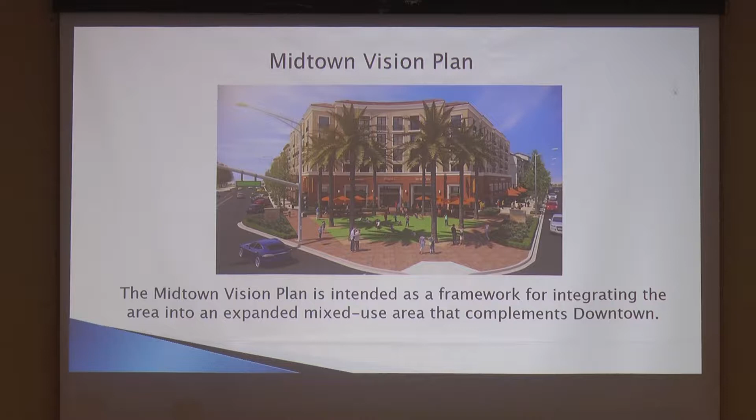The Midtown Vision Plan is based on 4 primary redevelopment objectives: maximize the economic development potential of the area by providing a variety of housing options and commercial activities; identify the best urban design framework for growth considering density, height, public space, etc.; ensure the goals of local residents are reflected in the vision; and incorporate strategies that have investment potential and are feasible within the local market.

On a larger scale, the overall integrated downtown redevelopment strategy is based on creating a connected framework of paths, activity areas, and destinations within and between downtown, Midtown, Gardner's Park, and with links to the Dunbar community. It is important to envision these areas as seamlessly connected while they continue to retain their individual identity and uniqueness.

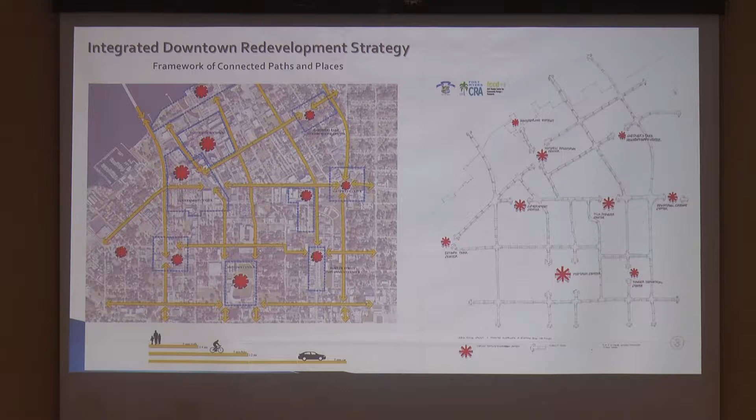This map identifies the proposed Midtown future land use categories. The light yellow designates residential low density, the darker yellow is residential medium density, the peach-colored areas represent the traditional community, and red areas are commercial corridors. The light purple is downtown, the magenta area in the center is Midtown, and the gray segment is primarily industrial. The light green areas are for recreation. A display board with this graphic is available for further review this evening.

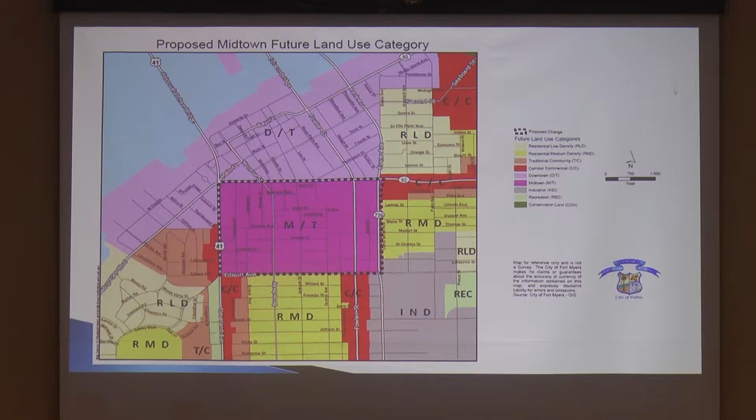There are numerous benefits to be gained by creating a vibrant mixed-use town center that includes a variety of residential and commercial opportunities. Studies show a clear connection between walkable environments and the economic viability of a community by creating a sense of place. In addition to lower infrastructure costs, the tax revenue can increase significantly.

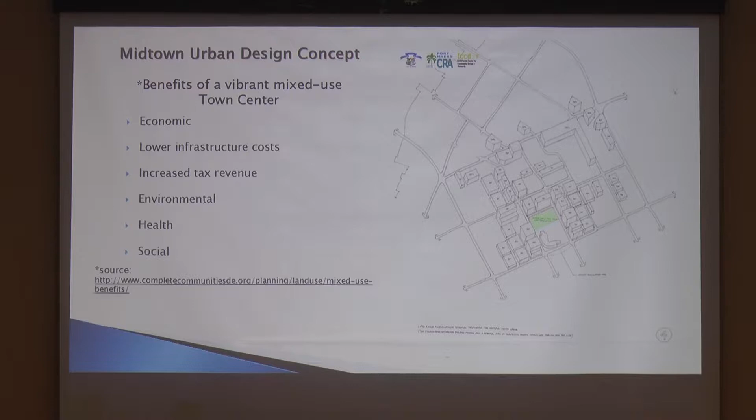By including green space, activities, residential and commercial areas, there is also an increased opportunity for social interaction. There is a growing body of evidence that the built environment, the man-made physical structures, and the infrastructure of communities is an important social determinant of health.

Here are just a few examples of town centers across the United States.

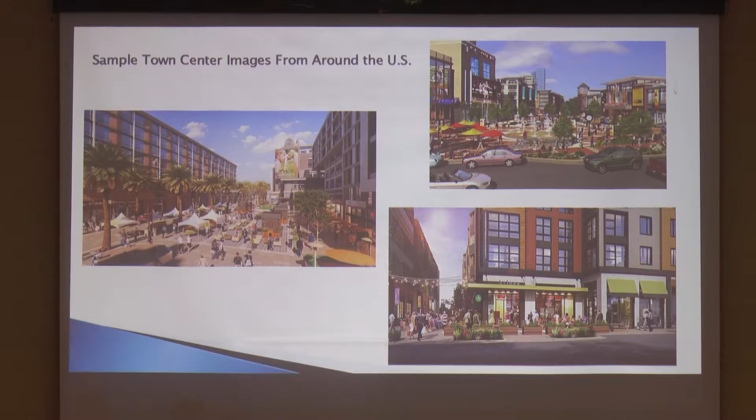To better visualize density scenarios, these renderings depict different density options and what they could look like. There is a display board with this graphic available this evening for further review.

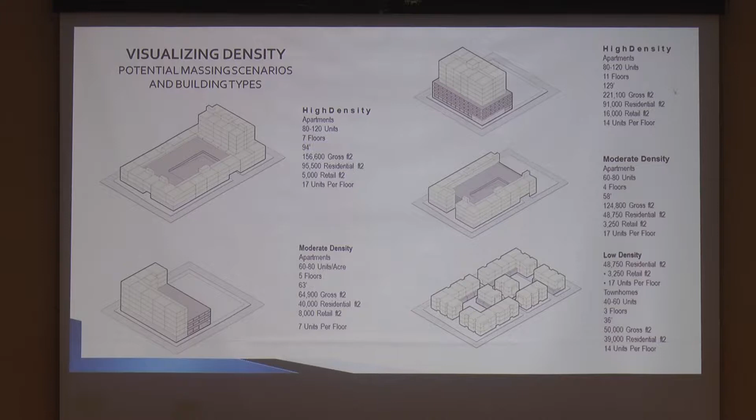At the conclusion of this presentation, Trent Green with the USF team will explain some of the graphics that are available for your review and comment this evening. There are numerous display boards with valuable information placed throughout the room and on the walls. At the conclusion of Trent's overview, please walk around and review all the material.

Then we will transition to the modified charrette, where you will have the opportunity to engage with city staff and the team from the University of South Florida School of Architecture and Community Design to ask questions and express your ideas about the Midtown Vision Plan.

We want to hear from you. Please fill out a comment sheet and either drop it in one of the boxes before you leave or mail it to us at the address on the back of the comment sheet by April 13th, 2018. You may also comment directly from the project website at www.myfmdowntownmidtown.com.

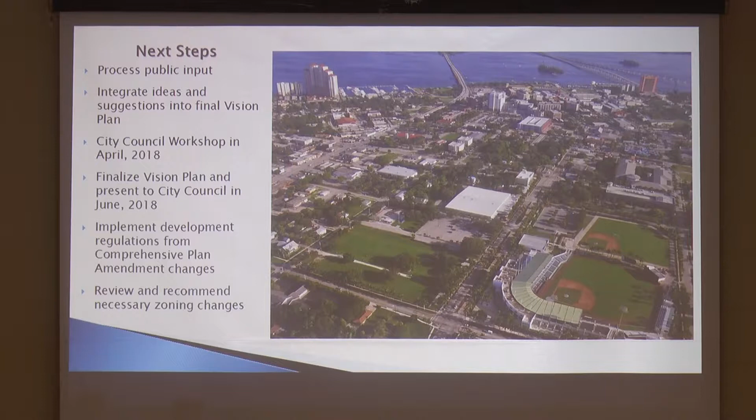Thank you for your interest in the Midtown Vision Plan. To view information and videos from previous advisory committee and public meetings, visit the city's website and click on the Downtown Redevelopment link, or visit myfmdowntownmidtown.com. After we hear from Trent Green with USF, we will move to the modified charrette. Please take this opportunity to review all the information and graphics on display, speak with members of the project team, provide input, and share your vision for the Midtown area.

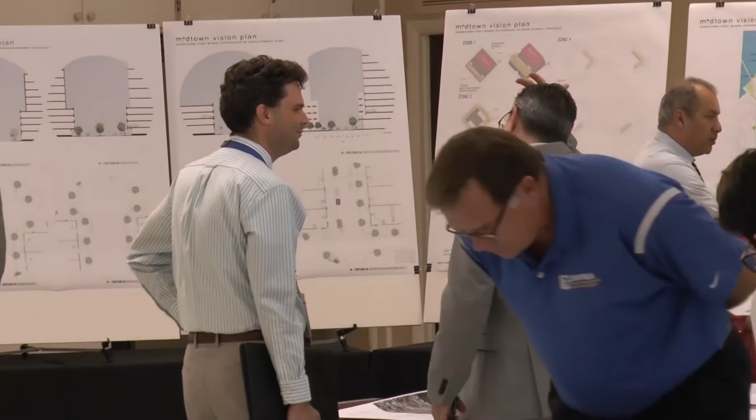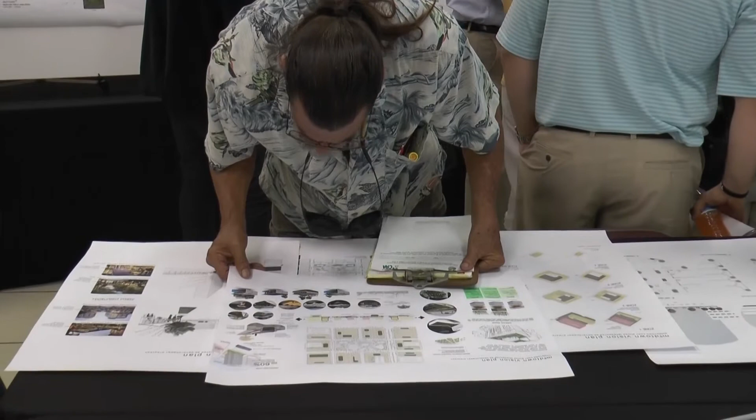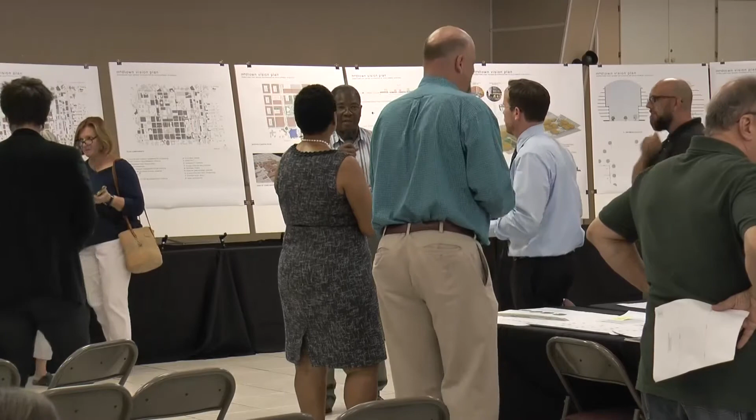Okay, one more thing that we wanted to show everybody, and that's a planning tool that we have pulled up on the screen. This is a 3D digital model that we're working with, or using as part of this process.

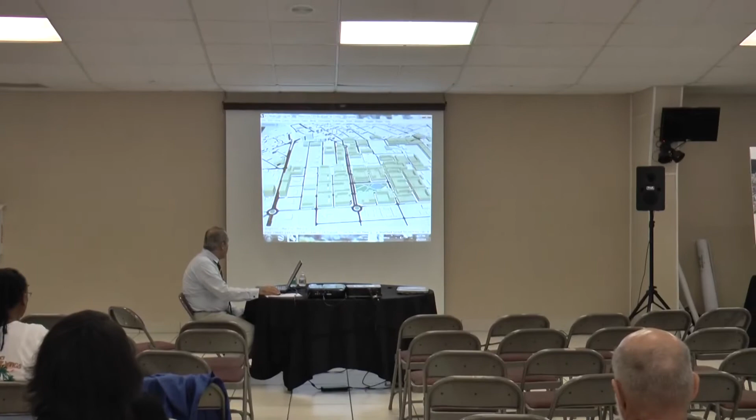And as you can see, we have all of the existing buildings in Midtown and downtown sort of already modeled. We also have the buildings that you see in the drawings here; we have those modeled also.

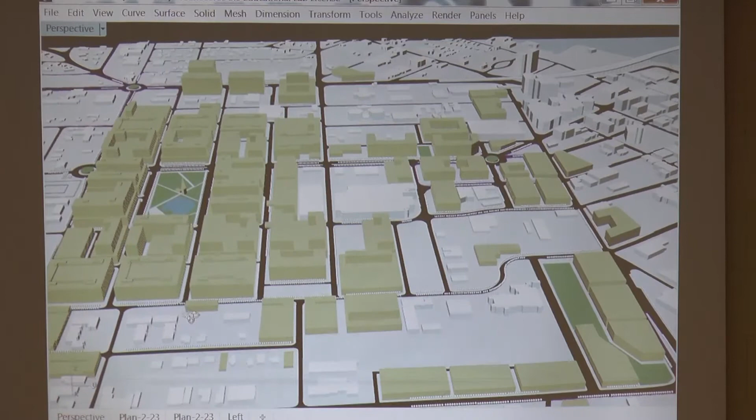This is a planning tool. It can be used for analysis. It can be used on an ongoing basis for looking at buildings that are proposed, on an ongoing basis. So what Abby's doing is showing you the many ways in which we can use this model, and of course, go down the street to the street level.

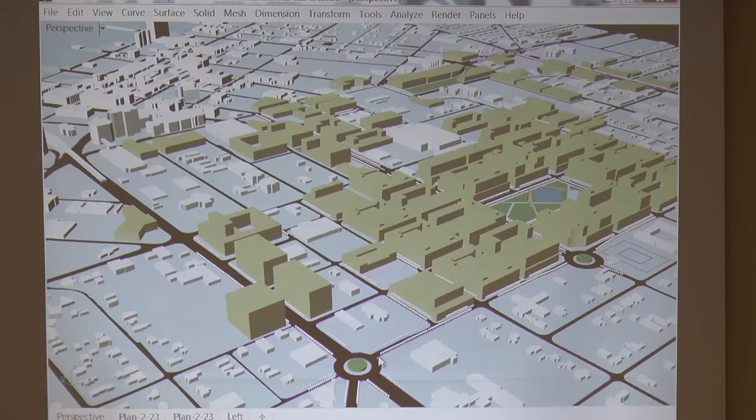Sorry, those little lollipops, those are trees at this point.

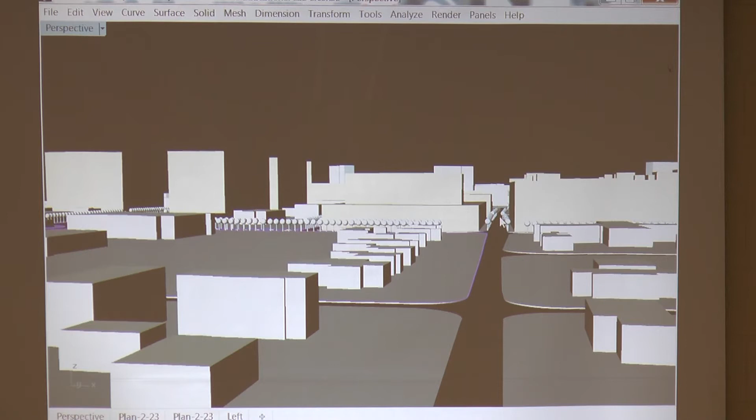But you can see we can get down to the human scale in this model, and we can start to show exactly what these public realm conditions would actually look like along the streets. And time permitting, if we can get to it, we hope to finish up this project with a little movie, a little animation, actually.

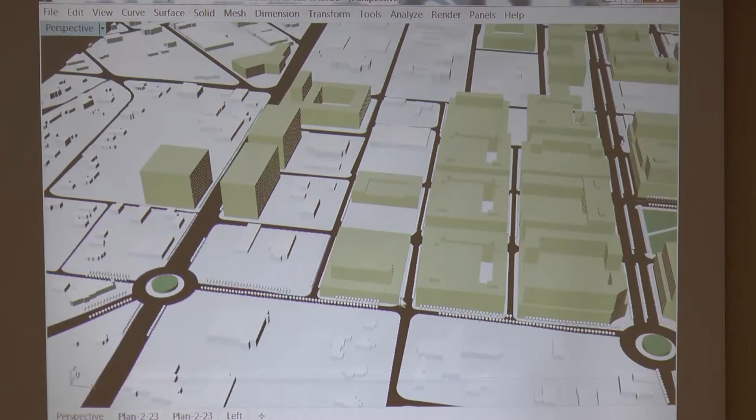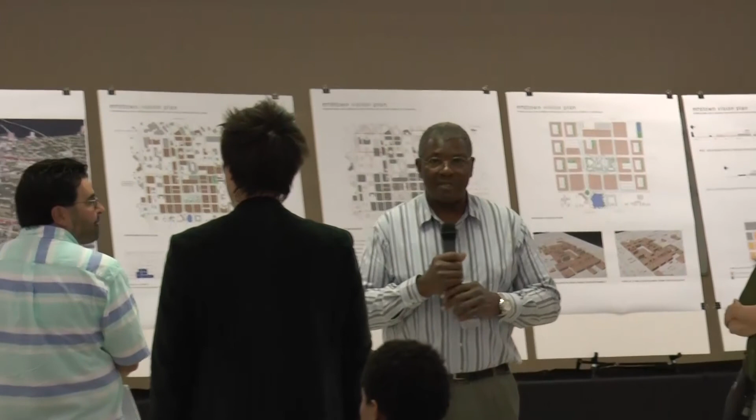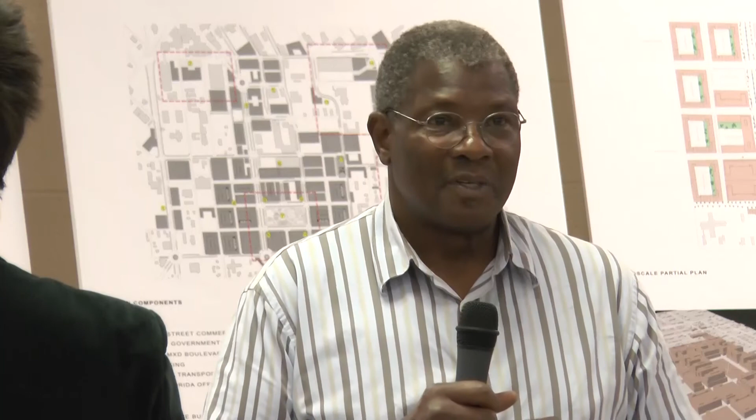Okay, if any of you have any last questions, we're here for as long as we need to be. So thank you again for coming out. Make sure you leave comments or ideas. As Michelle mentioned earlier, there's a number of different ways to leave your comments, your thoughts. Keep in mind, this is a draft. This is a fluid process still, okay, and we're certainly nowhere near being finished. Some of these might look like they're far along, but it's still not finished, okay.